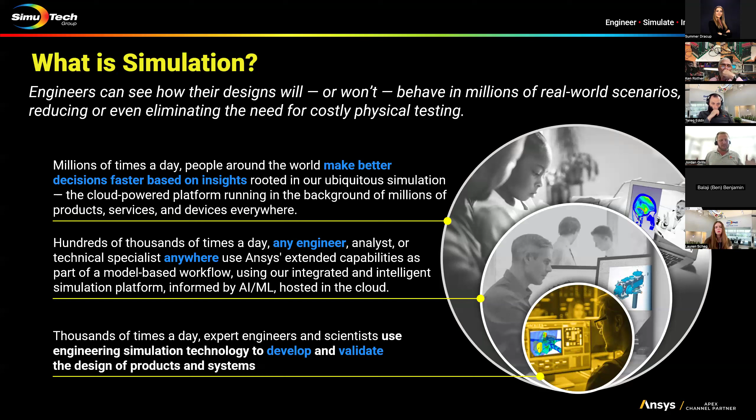Just to give an idea of what type of companies this typically works with: aerospace and defense, medical devices. Energy, green energy, is a huge and obviously booming industry that's continuing to grow, as well as healthcare and automotive. There's tons of solvers completely dedicated to the automotive industry too.

On top of those industries, before we hop into the fun stuff, here are the physics types. Today we will be covering electromagnetics, optics, and finite element analysis or structural analysis. Although we don't have anyone talking on computational fluids or CFD, we have phenomenal resources and engineers here at SimuTech, so if you have interest in that particular physics or solver, reach out to me, put your email or contact information into the chat, and we'll set up a time for you to talk directly with one of our engineers.

I'll get off my soapbox.

You're up, Tarek. All right, so my name is Tarek. I'm one of the engineers, like I mentioned, for the electromagnetics. I mainly work on low frequency, but I'll be talking about both low frequency and high frequency.

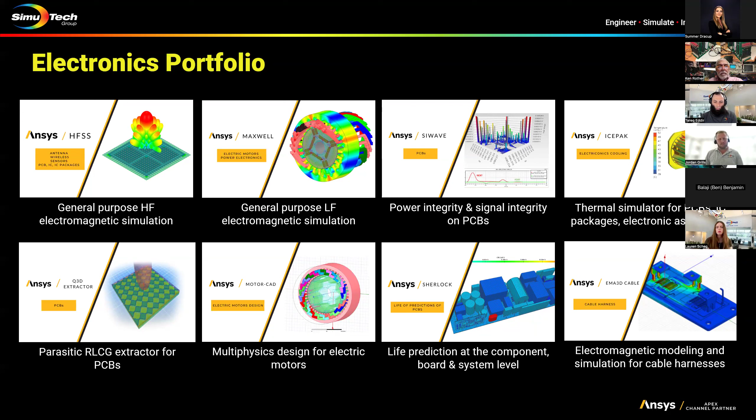Click next. So like I mentioned, low frequency, but I'll be talking about both. We have different software: HFSS, Maxwell, SIwave, Icepak, Q3D, MotorCAD, Sherlock, and EMA3D Cable. Sherlock and EMA3D Cable we're not going to be talking about now. They're a little bit more on the niche side, but the people who use them really benefit from them.

Next slide, please. So HFSS is the flagship high frequency solver. What we mean by high frequency is, depending on the application, the size will vary, but think of the upper megahertz to gigahertz range, things like antennas, filters, and stuff like that. It is the gold standard, the most popular, widely used, an industry standard, and it is a full 3D solver. HFSS stands for High Frequency Structure Simulator, and it is generally used for PCBs, filters, and so on.

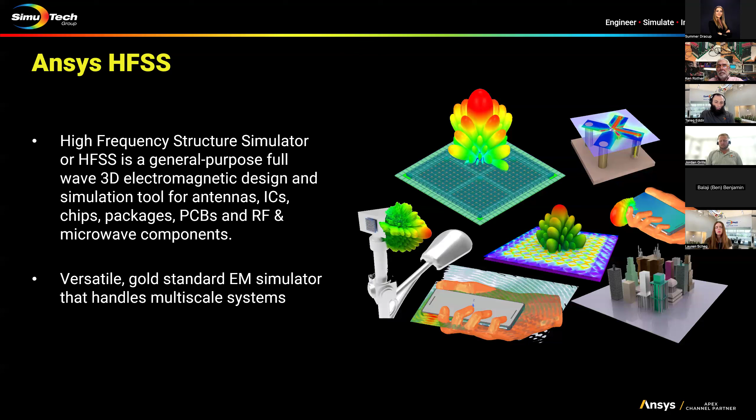We'll talk about the applications. If you don't mind going to the next slide please. Here are some of the main applications that would use HFSS, and it's not limited to these, but some of the more popular ones: antennas, 5G, RF, NFC, anything with data transfer like that. PCBs and boards—here we have a USB board, looking at the data transfer and some of the designs. There's EMI, EMC, which is a very popular one nowadays—that's electromagnetic interference or electromagnetic compatibility. I know testing for those can be very expensive, and if it fails, you have to go back and redesign your product, so simulation helps you get a better design from the beginning. Biomedical applications: you get human tissue, like the brain, as you see in the image there, and you could put sensors in. Automotive radars, filters, connectors, and other things.

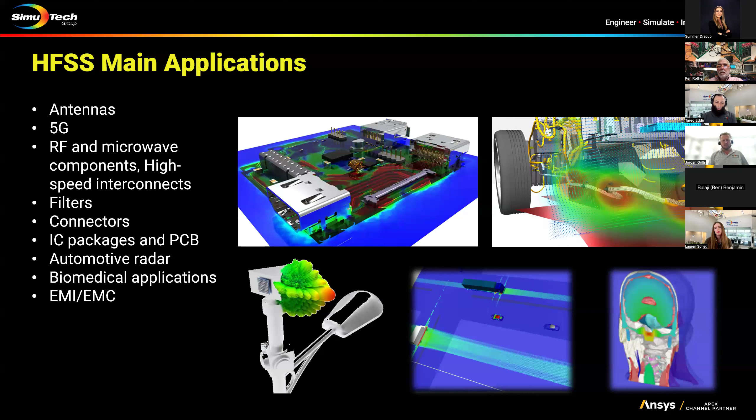Do you mind going to the next slide please? Here are some examples of the simulations. Because of the wide breadth, we just show some examples. The first one shows signal integrity and power integrity. One of the nice things about simulation is it gives you insight into things that are hard to test. In this case, you could see some odd behavior in your application, so you want to look at a specific frequency or electric field. It's sort of difficult to visualize electric field experimentally.

So you could hear in the simulation, narrow in on your application, see if you have hotspots, anything like that, for specific frequencies, if you have any resonances.

The next one shows autonomy. So if you want to look at cars, there's something called SBR type of simulations used for that.

The one at the bottom left is called co-site simulation. Sometimes you have to put a bunch of antennas, a number of them in a plane, and you want to look at placement, make sure that they don't interfere, they have good coverage.

Same thing with this smartphone biocompatibility. You may design a good antenna, but how does it work when you have human fingers touching it, changing the impedance and whatnot?

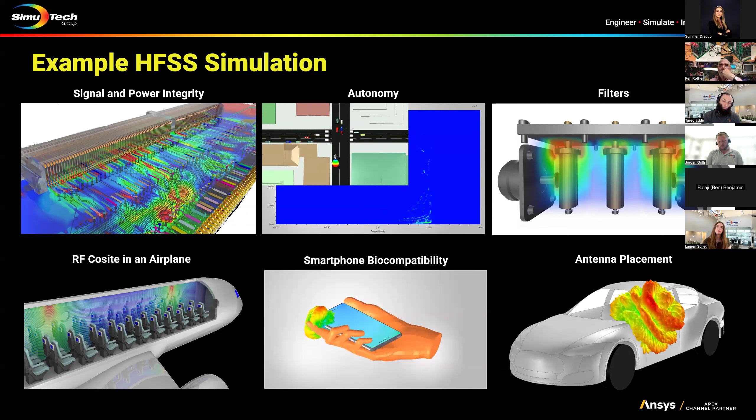And then we have filters. You could do high pass filters, low pass, band pass, and then antenna placements. What is the best placement for an antenna in your car or any type of vehicle or application?

Next slide, please. This is the next software, it's Ansys Maxwell. This is the one that I use quite frequently, and this is the low frequency equivalent. It is 2D and 3D, and uses the finite element method in the background.

When you say low frequency, think of it as DC, maybe in the low megahertz, depending on the application. But it's popular for anything in the hundreds of kilohertz range. It is very popular and is the gold standard. Here are some applications with rotors, linear machines, actuators, and transformers.

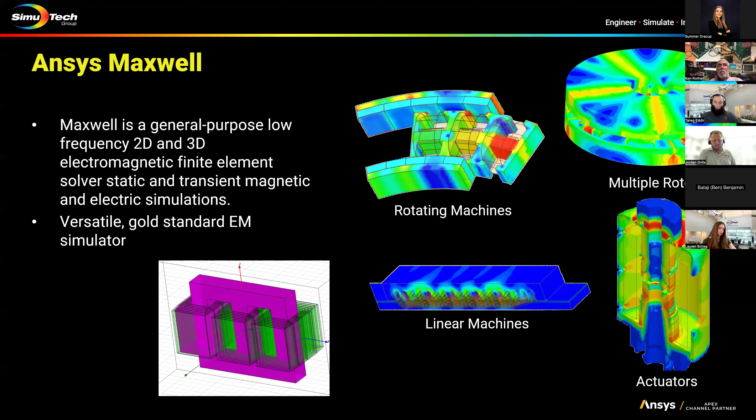Next slide, please. Some of the main applications, not limited to these, include things like sensors, hall sensors, actuators, solenoids, motors, anything with magnets, magnetic latching.

Sometimes you want to move magnets and induce current into conductors, wireless charging like you see with your phones or cars, wireless heat transfer, anything like that. Induction heating is a popular application, and then arc modeling and anything with static magnetics.

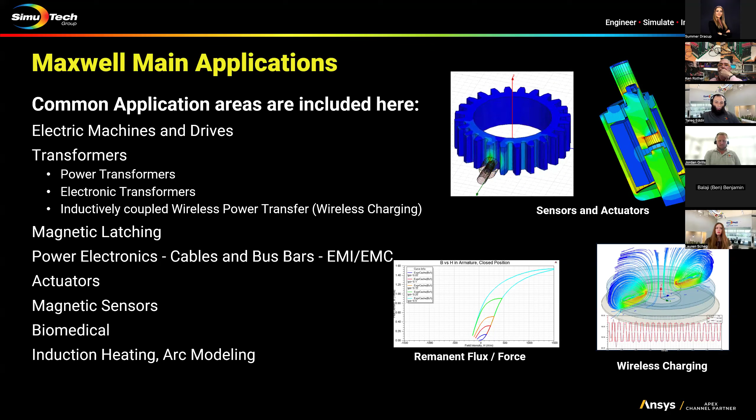Next slide, please. Here's some examples of the simulations. We have power electronics, sometimes you want to look at inverters and components like that. We mentioned wireless charging, that is a pretty popular application for it.

Wireless charging could be for phones, could be for very small components. It could also be for medical applications like MRI. MRI is magnetic resonance imaging, so you want to simulate the magnetic field. You could look at that in Maxwell induction heating.

But one of the most popular applications is electric machines, so motors, generators, and stuff like that.

One thing, go back, HFSS and Maxwell live in the software called Electronics Desktop. They use the same graphical user interface, so learning one or the other makes it a bit easier. Just some nuances with the physics are different.

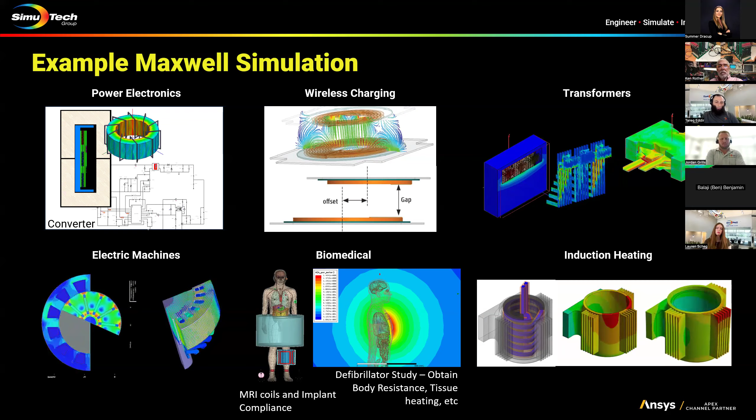Next slide, please. One of the popular newer Ansys software is called Ansys Motor-CAD. This is a software that lives outside of the Electronics Desktop, but this software is essentially specific for motors and generators. It's template based and has some finite element components, but it's so specific for motors.

So motor design experts benefit greatly from it, and it has a lot of expertise behind it. The people making it are motor experts. If you go on the next slide.

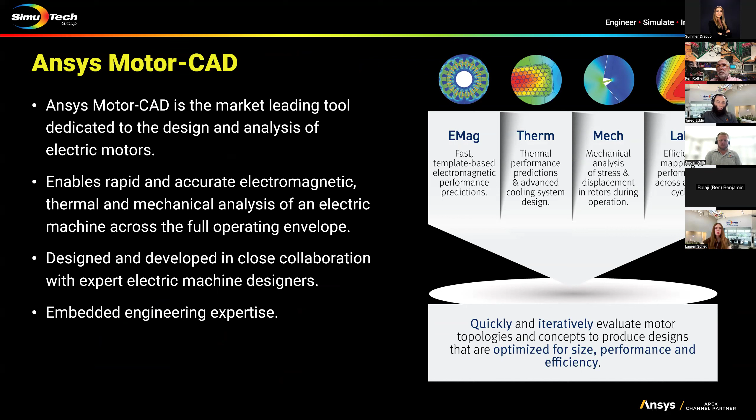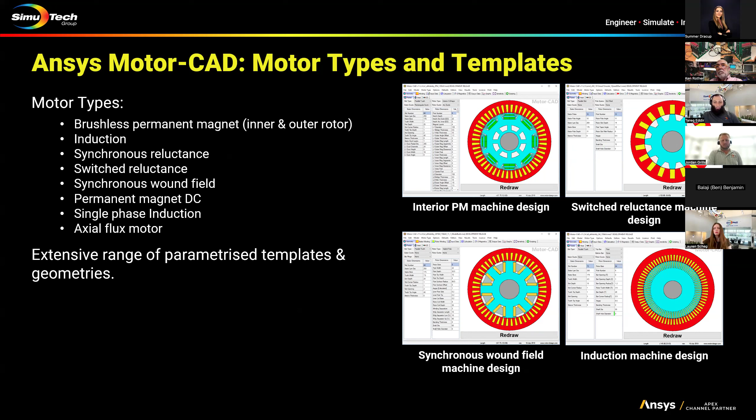So one of the nice things about it is you could just change the parameter number. So you could say, how would my motor look like with 24 poles versus 36 poles. You may want to optimize for weight, torque, force, some of the other things. It's easy to change numbers and it's very fast.

Next slide. It has different modules. We'll just go quickly through them.

Do you have any hotspots or any sort of saturation effects? And then you could look at the waveforms, torque, forces, voltage, current, power, and stuff like that.

The next module is the thermal module, and this is a very powerful module. You could look at steady state or transient temperatures.

You have a thermal network, and you could also do some type of feedback where you operate the motor and feed the temperature back, which affects some of your properties. It's very fast and pretty useful.

The next one is the lab. This is if you want to do efficiency and loss maps and torque speed curves.

And then the mechanical one, it's FEA solution based. So if you want to look at stresses in the motor, vibrations, and whatnot.

One last thing is you could design this very quickly and then export it into a Maxwell problem and solve the full 3D FEA simulation.

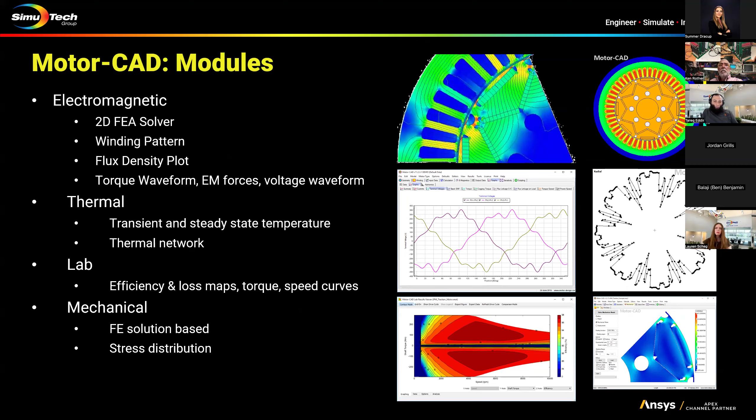Next slide, we have Ansys SIwave. This is a 2D, 2.5D solver. It's a hybrid solver, full wave. It's run on ECAD, usually used for printed circuit boards. You have large boards, and you could also couple it with HFSS to create submodels.

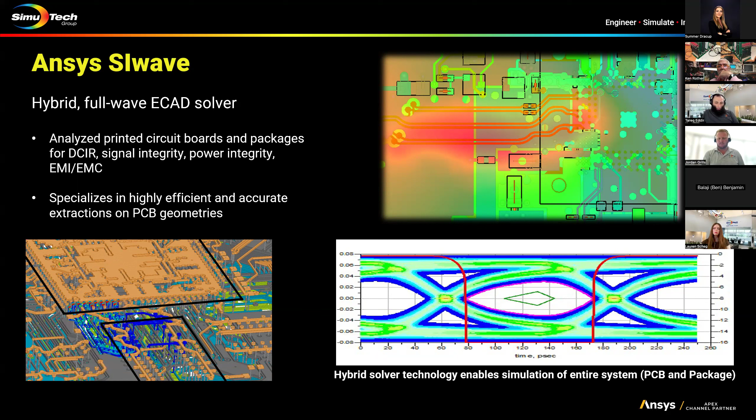If you want to look at signal integrity and power integrity and EMI and EMC, this is really good for insertion loss and S parameters. It's very specific, highly specific, but people who use it definitely benefit from it.

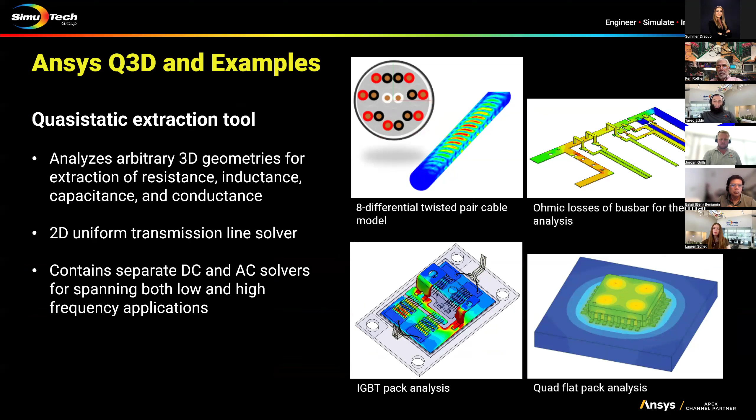Next slide. Q3D is one of maybe the lesser popular ones, but it is a field simulation for parasitic extraction. So if you want to get conductance, inductance, capacitance, resistance, stuff like that for your circuits, then that's what you would get.

This is the last one we're going to talk about today, but this is Icepak. This is a thermal solver and flow solver.

So if you want to look at your applications, simulate heat flow or airflow, with fans or cooling fans, anything like that, you could include it here. It couples with Maxwell and with HFSS, or you could include your own heat generation sources, move things around, see how the temperatures look, and also do feedback. So you could feed the temperature back to Maxwell and do some type of thermal feedback to make sure the temperatures are safe.

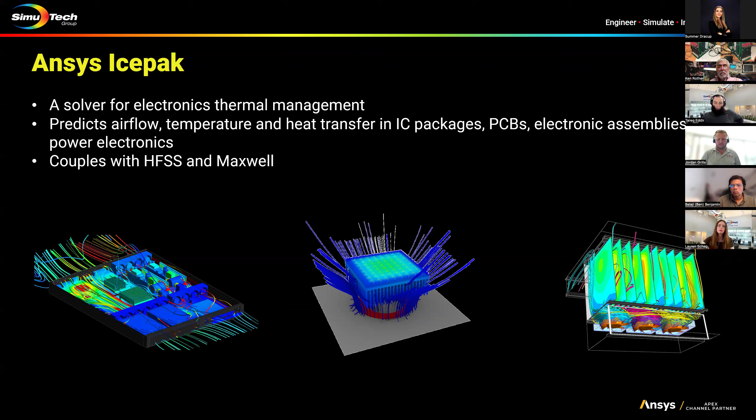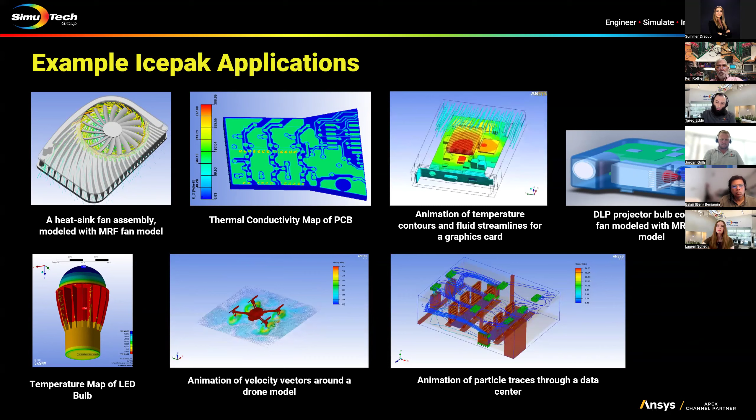Technically this uses Fluent, which is our CFD solver in the background. You wouldn't know about that, but that's it. And this lives in the Electronics Desktop interface. Thank you very much.

All right, so now we'll be talking about optics. Like I mentioned before, optics is anything that has to do with light, not just your eye. I like to think about optics as falling into three main categories.

The first being imaging optics, and this is the vast majority of optical systems that we typically simulate, just because of the performance that's required. Any system that forms an image, whether it's a microscope, a telescope, a camera, your cell phone, those all require lenses, like glass or plastic components, to get an image from the scene and put it either onto a sensor or to be viewed by your eye. And your eye is another example of an imaging system.

Next category is illumination optics. So any type of system where you're trying to get light from a light source into a target area. You can think of a flashlight, headlights on a car, or even your computer screen if you wanted it to be illuminated uniformly. Those are kind of illumination optics, and also things that we can model in software.

And then the third category is laser optics. Laser light is a little bit different from sunlight or a flashlight in that it's coherent, which basically means it can store information. So when we talk about fiber optics, communications, sending information to a satellite and back, or LiDAR systems, those all use lasers because they're able to encode information, and we can also simulate those. All three tools have capabilities to simulate all of them, but they each have their different strengths. So the Ansys optics portfolio is made up of three different tools: Lumerical, Zemax, and Speos.

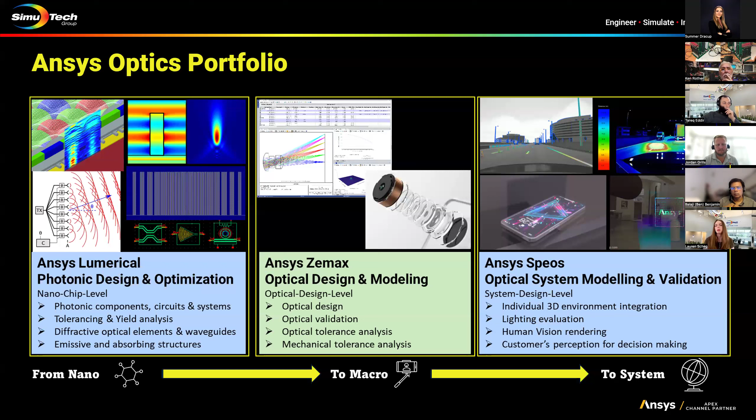Next slide please. Another way we can talk about this is how all three of these tools could come together for a single product design workflow. Something really great about Ansys is that all the different tools and softwares play really well together. There are a lot of connection points between them—in this case it's all the same physics, all optics, but of different scales. So we can do different multi-scale simulations, and we can also do different multi-physics simulations, which I'll talk a bit more about later.

We have our three separate engineers presenting on electronics, optics, and structures, but all three of those areas talk to each other, can pass information back and forth, and really give you a full picture—a full digital twin, it's called—of what you're trying to build.

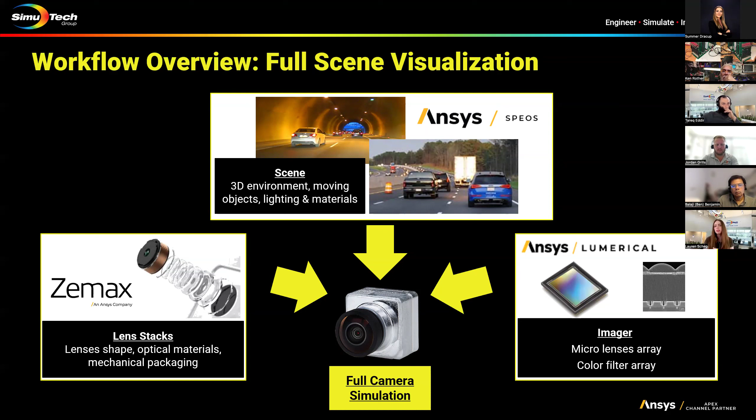For example, if we're trying to make this prototype of our full camera from scratch, we could use Zemax to design our lenses—the actual glass components in our lens. We would use Lumerical to design the imager, so the camera sensor at the back. And then we could use Speos to bring in the full 3D environment, what the lighting conditions are, what the materials are, and if there are any moving objects in our field—is our shutter speed fast enough to capture that?

Zemax ships with a whole catalog of design templates, so you could find something similar to what you're ultimately going for, and just make a few tweaks and optimizations to get to a better solution faster. It also has a catalog of different materials for lenses, allowing you to optimize on the materials as well as the surface profile, the shapes of those lenses.

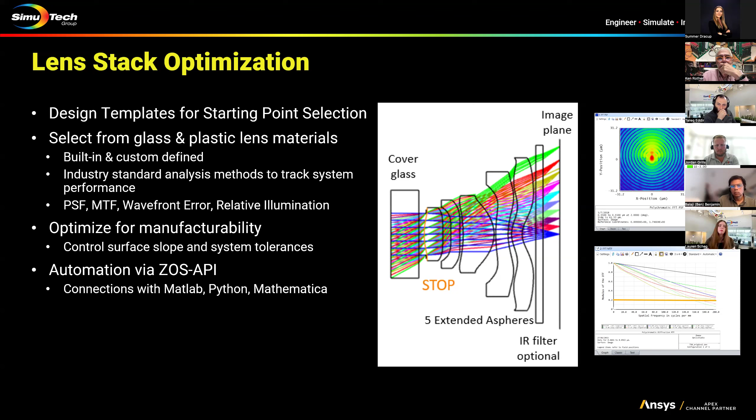We also have the ability to optimize for manufacturability. In this image, you can see some wonky looking lens shapes. We want to make sure these are actually manufacturable, basically controlling the shape factor available to the optimizer. And I believe all Ansys tools are able to be automated via API, definitely Python across all of them.

Once we have an initial design that we're happy with, we can go into tolerancing. This is where we introduce real-world manufacturing and assembly defects to determine how it's actually going to operate in the real world. We can design a perfect lens that looks amazing, but if it's made just slightly wrong, how much is that going to impact our performance?

So we can do tolerancing and account for both fabrication and assembly error, the actual making of it and putting all the pieces together. We can look at tolerances both optical and mechanical, so both the lenses themselves and how they get mounted into the system.

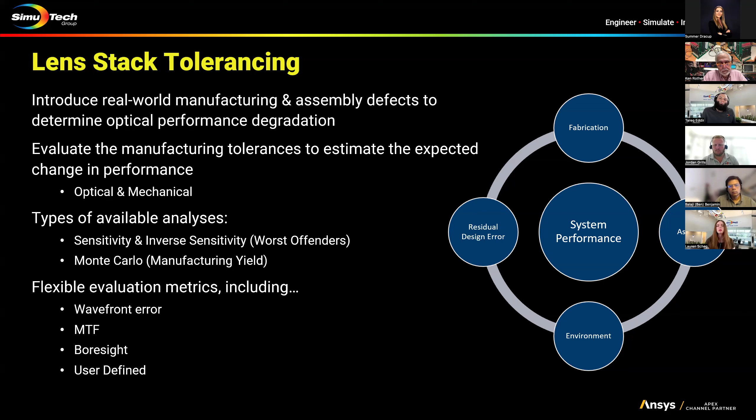And then there's different types of tolerancing. You can look at sensitivity analyses, which is basically how sensitive each component is, like how much of an overall impact on the system it is to have that one lens made correctly. And then Monte Carlo gives you an idea of overall yield, combining all the different tolerances together. How good do we expect this lens to actually be when it gets made?

So a bit on the multi-physics piece. If we have our lens, we're happy with it, we've done our tolerancing, we want to see how it's going to perform under actual real world conditions.

So say, for example, I'm designing a camera, but it's going to operate on a satellite. Those conditions are different than here on Earth. Maybe the temperature is different. Maybe there are different forces as the satellite's being launched into space. Do my lenses shift around? Are they still going to perform?

Actually, the Hubble had a problem with that, where the mirrors didn't get properly analyzed structurally and thermally, and once it was up there, they ended up being out of focus. So it's a very critical part of your optical system design.

But basically the way it's done: once you have your optical design and the mechanics that are holding it, we can send it to an FEA tool to determine what the different structural and thermal loads will be. So if there's a temperature gradient across our lenses, we look at the stress on how each lens is being held, as well as general gravity and forces under operation.

All of those are going to have impacts on the lenses, like the shape of the lens itself, as well as the material density, so the refractive index. And it may not be uniform across all. This is why we do this type of analysis. That information can then be brought back into OpticStudio, where we see what the performance is going to be after all of these deformations have happened.

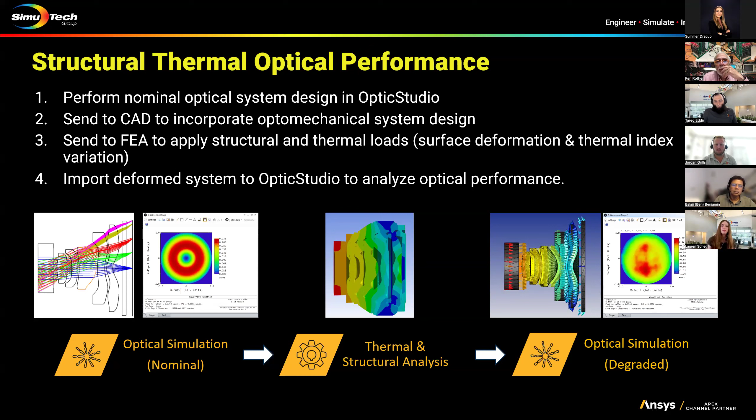Once we're happy with our camera system, we can export it to SPEOS. Zemax is really good at its ray tracing, really good at image generation. So why not let it handle the lenses part of the system, where we can use SPEOS to build up the full 3D system. Basically this is the capability of the way the two talk to each other, where Zemax pre-simulates the important optical components like distortion, vignetting, resolution, and focus, and then passes that off to SPEOS. That's the way we can bring it into SPEOS.

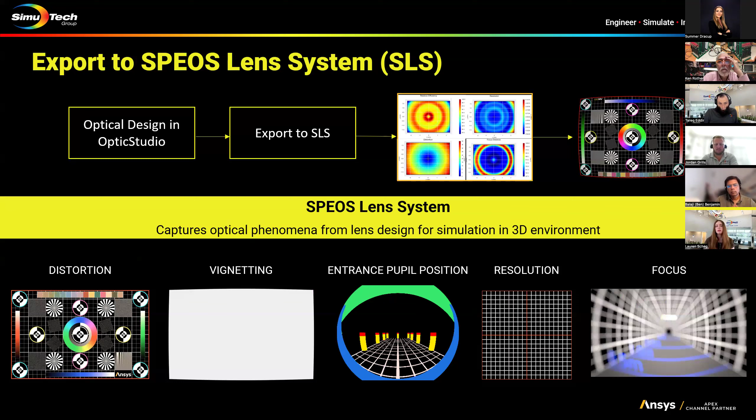So once our lenses are all good and imported into SPEOS, we can import our CAD model, building up our full 3D environment that our system is operating in. We apply the different material properties to the different objects within our scene, apply whatever lighting conditions are going on, and then we can start running some simulations.

So some ideas of different simulation results we can get. The simplest and quickest is a pixel grid projection. For example, if we're trying to do facial recognition, we need a certain number of pixels across someone's face to be able to resolve it. So we can do a quick check of whether we'll have enough pixels to theoretically resolve it, depending on the magnification and field of view of our camera.

A little more complex, we have geometric simulations - basically a check of what the field of view of our system is, good if you're trying to determine where to place the camera, or whether the field of view is sufficient. Then photometric simulations incorporate all the material and lighting information into the simulation, so we can get a picture of what the scene is actually going to look like.

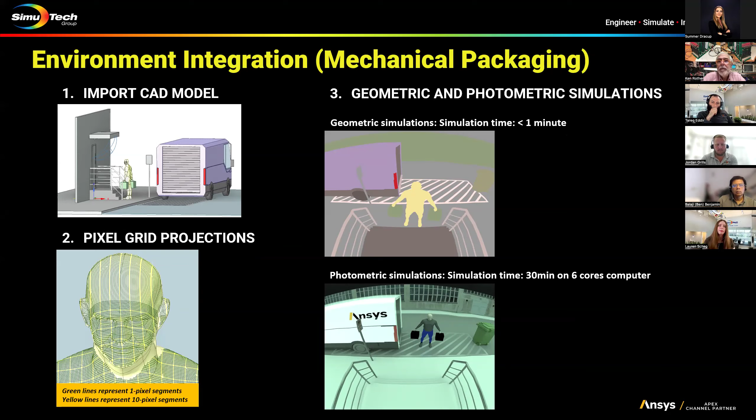So in parallel, we can be doing imager development in Lumerical. We're designing the sensor, the camera sensor at the back. In Lumerical we can design micro lenses, which help focus more light onto our sensor, color filters so different pixels are sensitive to different colors, and our metallization and silicon substrate, which convert photons into electrons. So we can do both the design and analysis of these different components within Lumerical.

Ultimately, for this type of work, the key result we're looking at is our quantum efficiency - basically the ratio of how many photons that hit our sensor end up getting converted to electrons, since that's what's actually being read. That's on a pixel-by-pixel as well as wavelength basis. So that's the information we want from Lumerical after we finish our design.

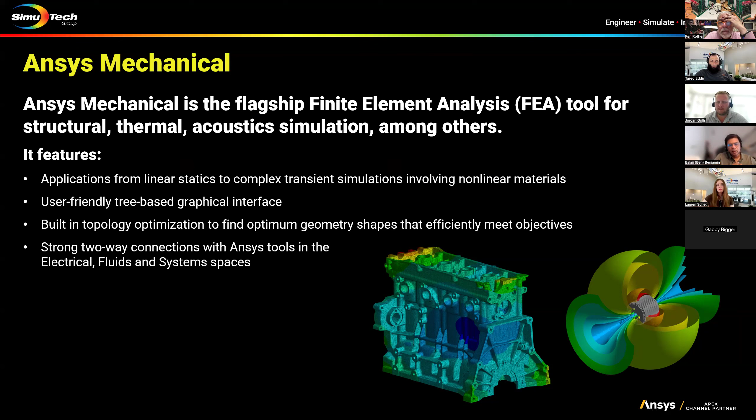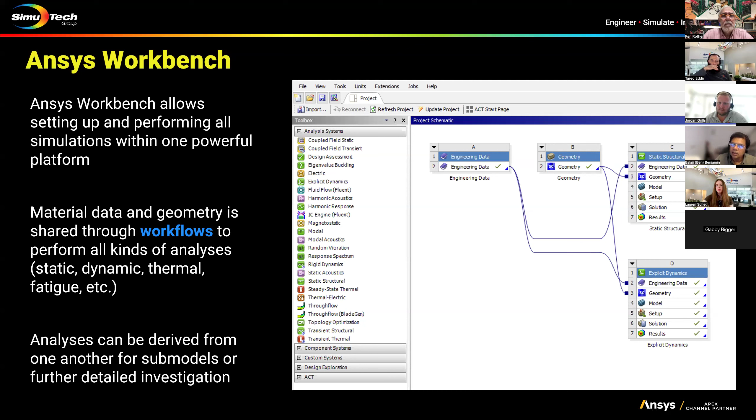A good example would be a two-stroke engine where there's a reed valve. The reed valve vibrates and it alters the flow and pressure in the combustion chamber. At the same time, a change in pressure can alter the vibration of the reed valve. So if you want to study something like that, Ansys has this multi-physics coupling, and you can see it's done in one place in a GUI form.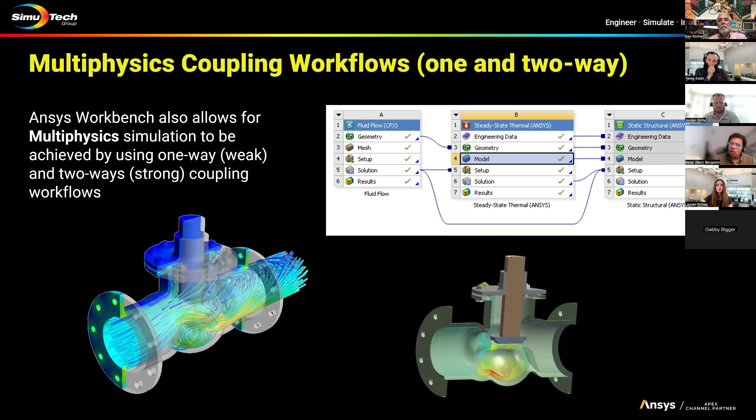One of the things is, if you run any simulation in the mechanical domain, you pretty much go and say, okay, what's the material, what's the geometry, obviously have to mesh. You're running an FE analysis simulation, looking at results, post results, getting into writing reports, or even exporting to an Excel file and doing some post calculations. So this is usually the routine, and that is easily done.

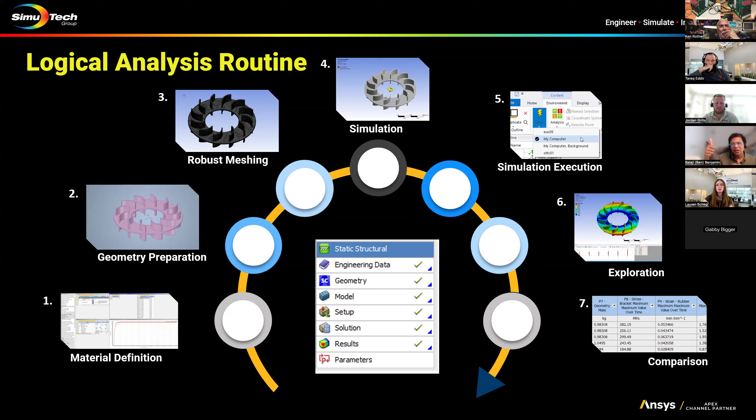When you get into Ansys Mechanical, what you see on the screen, if it's not clear, is a kind of modal analysis, a vibration analysis, and a static structure analysis. But the entire schematic, what was mentioned in the previous slides, is all introduced here, done in a GUI form. Recently it's going like an iPhone type, where you can even insert some apps, maybe certain fatigue calculations, critical speed analysis, or even certain turbo machinery force mappings. So these kinds of ease are introduced within Ansys Mechanical.

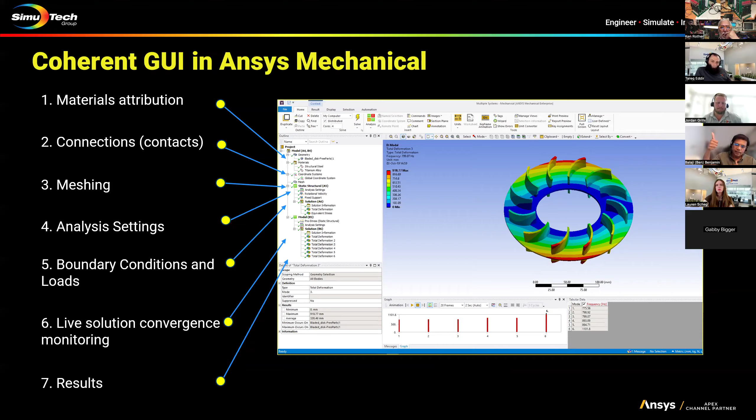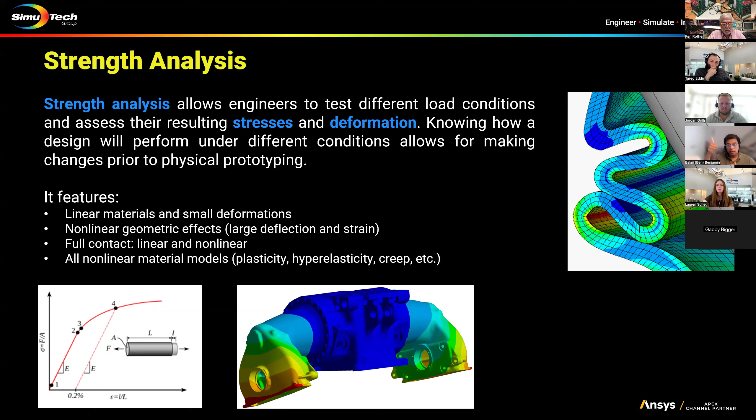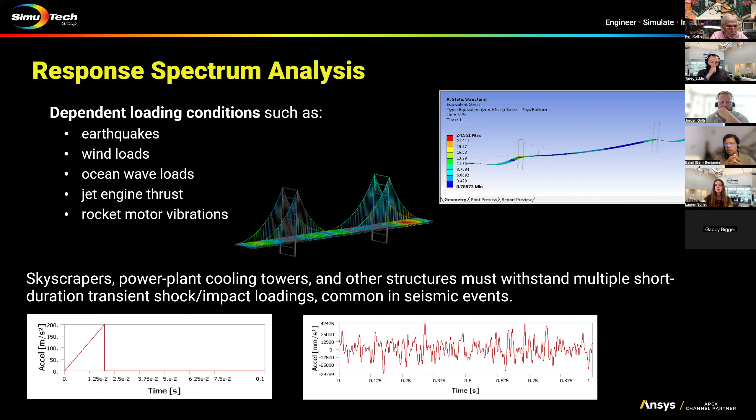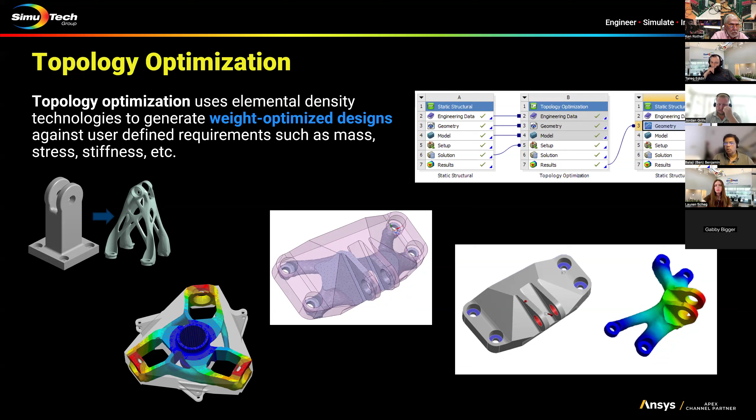And so that's the schematic. So whatever you see on the screen is pretty much displayed or can be done or simulated with just these three project schematics.

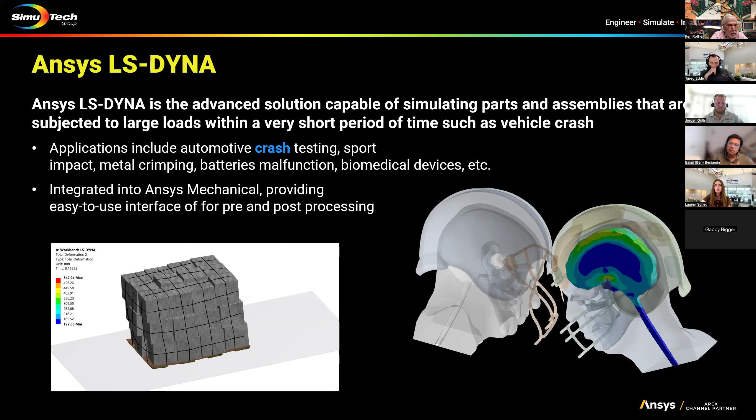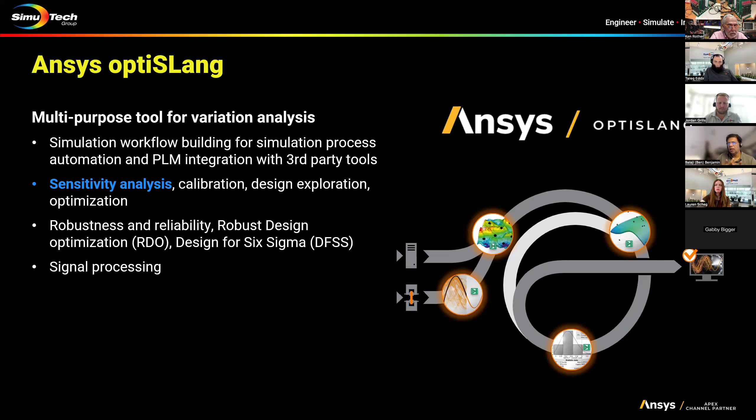Final slide: if you go to any automobile industry, they're into a lot of Six Sigma and sensitivity analysis, and Ansys has recently developed a very interesting multi-purpose tool to do a lot of sensitivity analysis, not only in design parameters, but also in cost, weight, corrosion resistance, and so on. So this is not exclusive to mechanical, it also extends to HFSS and Maxwell. The interesting aspect is that almost all of the applications we talk about here do have a handshake as a multi-physics application. And that is it, I think.

Next slide. Awesome, thank you, Bal. All right, I'm going to do this in about 60-ish seconds to make it quick, and we can get to the questions, because I know there was at least one that popped in here. And obviously, if there are any other questions you have, feel free to shoot them out. That's not the Gabby thumbs up system.

I love it. Okay, so real quick on the eligibility criteria, a few things that will allow you to qualify for the Ansys Startup Program. You have to be a privately held company, less than 10 years old, with less than 5 million in annual revenue. This is a bit in flux, I think it might actually be closer to 10, but roughly around that amount. And you cannot be an engineering consulting firm or simulation services company.

Other than that, I'll get a little more into this on the next slide, but if anyone has interest, at least in the products themselves, the good thing is our engineering team would be available to discuss your particular use case, because obviously there's a lot of different questions and discovery that happens on both sides for that.

But just a couple quick stats on the startups: we have over 1,400 startups in 50 different countries. One that is near and dear to my heart is the one all the way to the left there, which is Junyali and her team over at Photonect, based out of Rochester. We've met with them a ton of times, they're great people to work with. They come out of NextCorps, one of the incubators based in Rochester. Her and Dan are great.